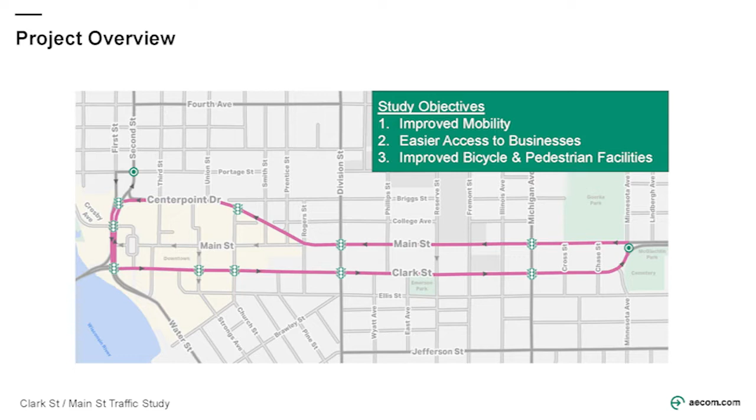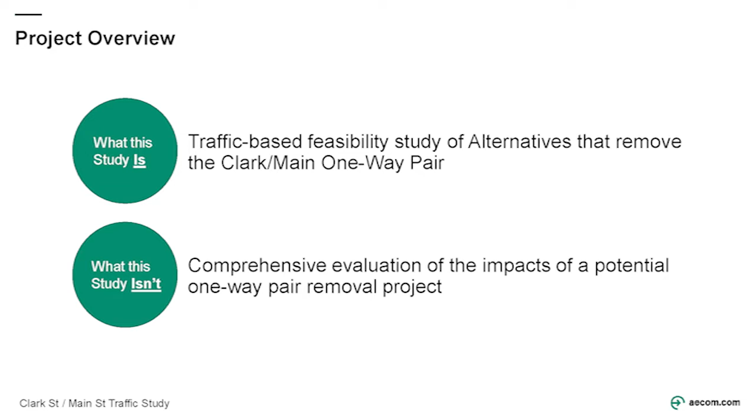To set expectations on what this study is, this is a traffic-based feasibility study related to removing those one-way streets and turning them into two-way streets. This is not a comprehensive evaluation of all the impacts that could be involved with this type of project. If the city decides to move forward with pursuing this, that will be addressed further down the road.

We took a look at three different alternatives for the study. Alternative one: we looked at setting up Clark Street to handle the majority of traffic coming through downtown, while Main Street would still be two-way but more of a minor side street. Alternative two: we looked at what would happen if the majority of westbound traffic stayed on Main Street while the majority of eastbound traffic stayed on Clark Street, with both streets converted to two-way. Alternative three: we looked at keeping the one-way streets as is, but reducing them from two lanes in each direction to one lane in each direction.

The footnote there says alternative three does not meet the purpose of the study, those three objectives I pointed to at the start, but it was used as a point of comparison.

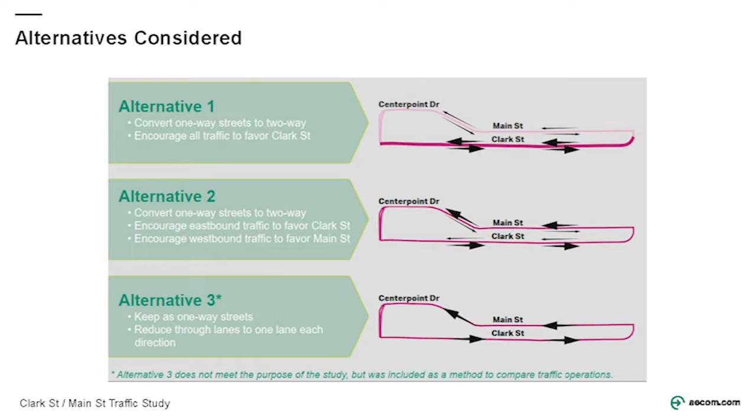So I'm going to go into the results of the analysis. When we talk about traffic studies and analysis, we usually talk in terms of level of service, which is a measure of average delay that's experienced. It's given a letter grade, much like in grade school. Level of service A means very little delay, level of service F means lots of delay.

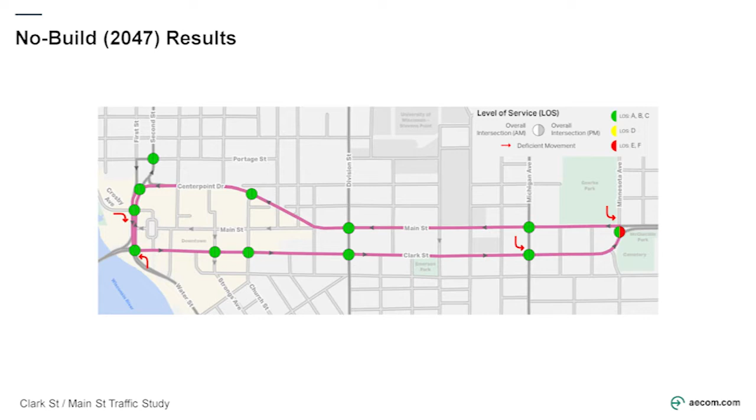So what you're seeing here is the no-build from future year 2047, which means the existing roads the way they are, but with future traffic. You can see there's not too many issues out there. We have a couple of red arrows that indicate individual movements where the level of service was deficient. But a lot of times those are things that can be addressed with minor changes, or sometimes it's just something we will accept because the impacts would be quite great to improve upon that.

So next slide. Getting into the results for alternative 1, this is where Clark Street acts as the primary route. I wanted to step back too and mention that in order to model these as two-way streets, we had to make some assumptions on where traffic is going to be going. So what we're calling the baseline scenario, that was our best guess as to where traffic would be going. But we also recognize that this is not a perfect science.

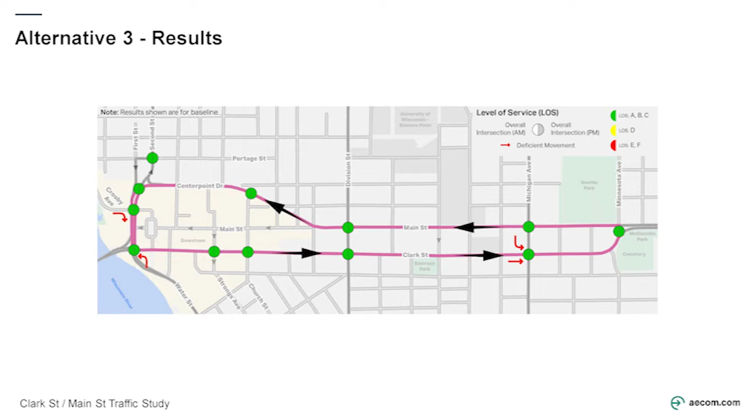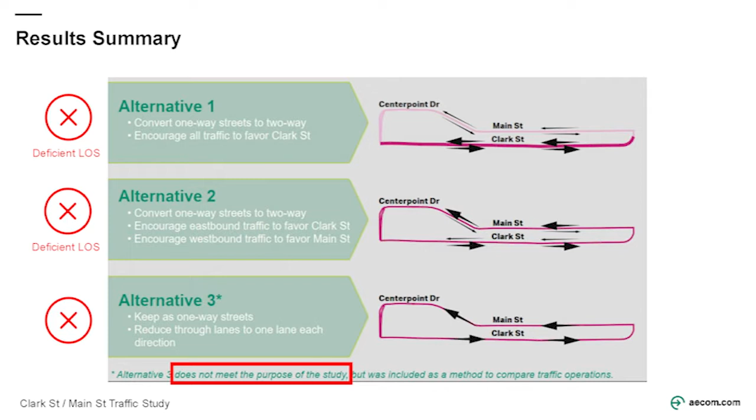So where does that leave us? For the 3 alternatives we evaluated, unfortunately alternatives 1 and 2 were not feasible due to deficient level of service, and alternative 3, even though the level of service looks okay, it doesn't really meet the goals of what we were trying to accomplish. So we moved on and decided to take a look at additional alternatives.

What we did was, if you notice from the first couple alternatives, the deficiencies seem to be centered around Division Street and Michigan Avenue. So we realized that maybe we can take a look at an alternative where we make some of these two-way street improvements to the west of Division Street.

Rogers Street and Church Street — well, Rogers Street is a residential street, Church Street has more commercial access to it. But in order to make this cutover, we would have to take some parking away and convert it to a one-way street, and those things were not desired for those streets. In addition, this new street is going to have to accommodate trucks as they take that one block jog from Main Street over to Clark Street.

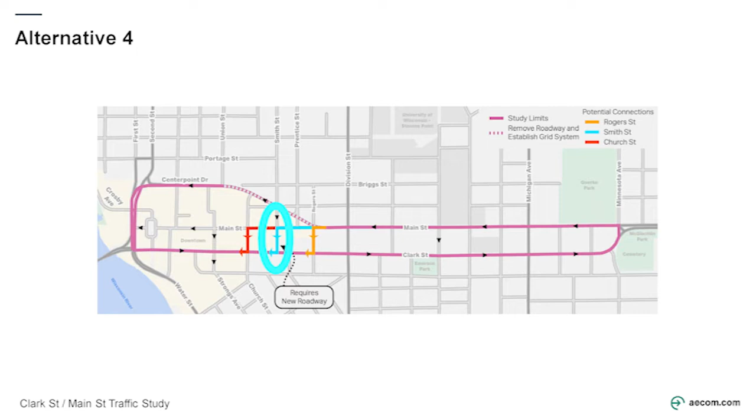Next slide. So this is what that alternative 4 ended up looking like.

The pink roads are one-way streets that would remain as they are today. The purple streets are roads that we would be able to convert from one-way to two-way streets. The dashed pink line is the removal of Centerpoint Drive, that section where it kind of makes a northwesterly cut from Main Street up to Briggs Street.

So one of the side effects of this project is we would be able to remove that street and replace it with a downtown grid system.

So as far as the one-way streets on Main Street and Clark Street, it would work either way if it remained as is today with 2-lane streets in each direction, or if the city wanted to go to a one-lane street in each direction.

A couple other things to point out here. Water Street, we could reduce the width of that road pretty drastically, considering the reduction in traffic volume. And then Water Street also would have a direct connection up to 2nd Street, kind of on the upper left side of that graphic there.

And we would be able to cul-de-sac 1st Street so that we would get rid of that. Right now, that's the transition from two-lane or two-way to one-way streets.

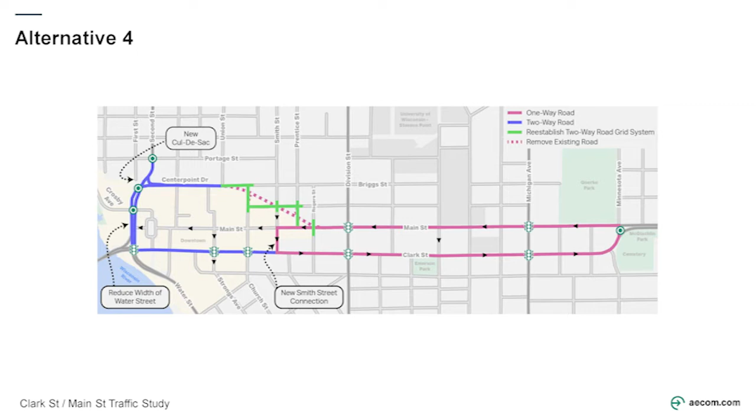But just to kind of finish up here, this alternative 4 checks those main 3 boxes of improved mobility. We have easier access to downtown businesses and also improving the bicycle and pedestrian facilities.

A side benefit too is this option will free up quite a bit of land for the city to either redevelop or turn into green space or whatever the city would like to do with it. The net effect is about 2.4 acres of land that would be freed up by making these changes.

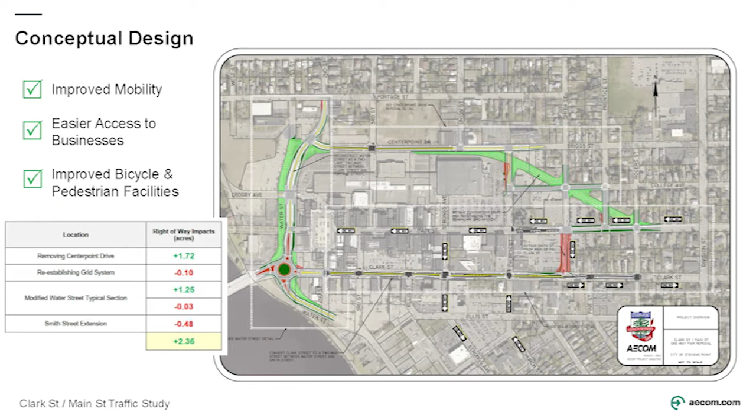So through traffic, people coming from the east going to the west, across the bridge to Mead Park, to Junction City, wherever it happens to be. By removing that section of Centerpoint, you're now forcing quite a few turns. Doesn't that create more problems?

So the turns would happen on that new stretch of Smith Street, the extension. That would be your transition point from two-way Clark to the west to one-way Clark to the east. But if people aren't aware of that and they miss that Smith Street turn, that's going to take them right down Main Street.

It would. So we would have to be very clear about that with the signing. Yeah, everybody looks at signs. Yeah. Okay.

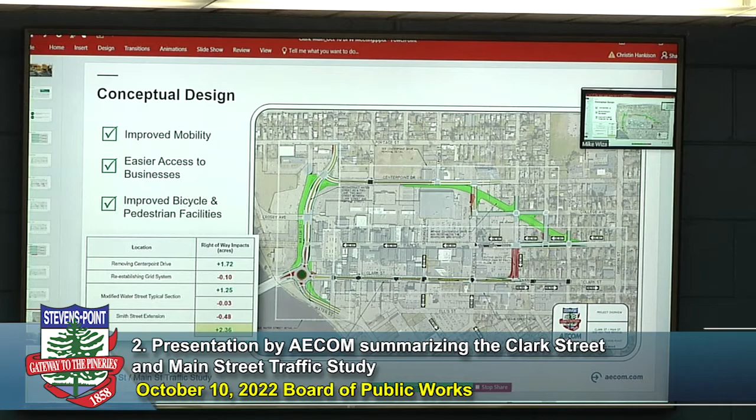All right, follow up? No, that we're good? Yeah, Alderperson Shore. Thanks. David Shore, Alderperson for District 2.

This is very helpful, thanks for doing it. I'm glad that you looked at Alternative 4, because some of the things that have been on my mind about this area are very much focused in that downtown portion. When you talk about access to businesses, my sense is that's very much an alive concern on that stretch of Clark Street.

At least one of the business owners I've talked to about this issue of switching to two-way was very eager to see it happen. And then over on Centerpoint, it's more the direction things are going and what we're trying to do, so that's great. Those are the two right places, I think, for access to businesses.

And then that stretch of Water Street, as great as the bicycle infrastructure project we did is, and it is, I know there's concern, including the constituent who lives in my house with me, that's not the best part of the infrastructure there, which, as we've talked about before, is really important in terms of that relationship between downtown and the park and the waterfront. Thanks.

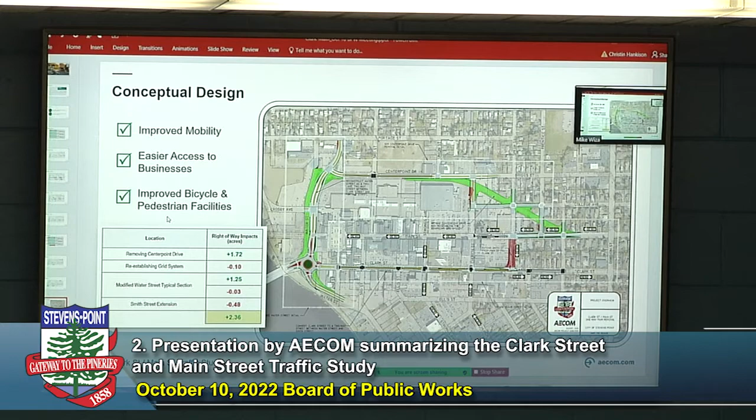And the second question is the cul-de-sac projected for the termination of First Street. Why is that a good idea, or why is that proposed? Sure, so to answer the first question, you're correct, we did not look at level of service for bicycle and pedestrian facilities. This study had a very limited scope. It was a traffic-based feasibility study, so we didn't dive into all the impacts apart from, is this something that could work from a traffic standpoint?

For your second question about the cul-de-sac on First Street, the purpose of that cul-de-sac was to separate out the way Water Street connects to Second Street. Right now it splits into a northbound and a southbound road, and with Water Street becoming a two-way road all the way up to Portage Street, we had that route along Second Street, so there was really no need for that connection to First Street. There are a couple businesses on First Street that would still need access, and they would still have access, but that connection to Water Street would be removed.